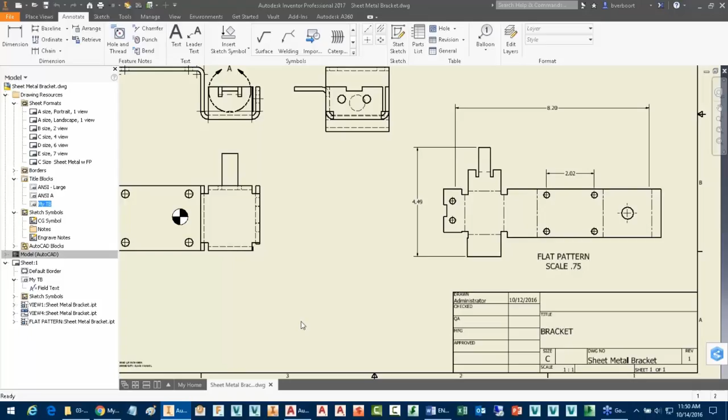Another approach that I take to simplifying and making things work a little bit more smoothly for a design group is to rework the way that templates are structured. In many cases, we just don't really think about this much. I'll go ahead and close this particular

drawing. And when we select new here, we get the standard, organized by dimension type, right? So English and metric. So that's going to help us control standards. But it might be helpful to have additional information organized a little bit differently, maybe by document type.

So I'm going to show you a folder structure that I built out that might be helpful for you guys to consider when creating additional templates to get work done a little more quickly, because each one of these templates is just a blank start. Every time you create a new drawing, for example, it's going to be a brand new fresh start, and that's going to be the case for the part files. That's going to be the case for the assemblies.

If you find yourself doing the same thing, you open a new assembly, you put the assembly notes there for the assembly process type, and you go about creating the views. Well, that's just a lot of work over and over again. You could be using a template that has that stuff predefined in it. That gets you 25% done right out of the gate, and then you're able to focus in on some of the annotation and detailing tasks at hand.

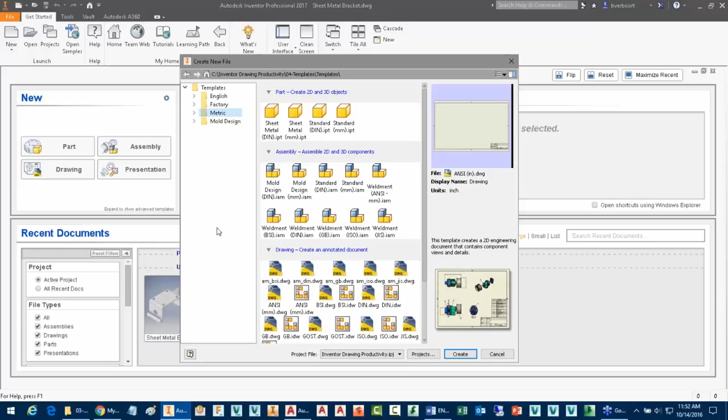So I'm going to go ahead and close up our new dialog box for templates, and I'm going to browse into a folder that I've just used to centralize a couple of options. So right now my project file is pointing to this folder for templates. Let me just make that a little more real. So we'll go to our get started, and I'll go to the projects environment, and then here on folder options you'll see that our templates are coming from this directory called templates in the 04 templates subfolder.

So I'm just going to do a little shell game here, for lack of a better description, just to make things happen a little more quickly. Here's the folder that we were just looking at. Okay, so there's a templates structure that's standard for that new dialog box. So here are the standard templates that we can choose. There's some template customizations we can do for PDFs, and then here's that English folder and all its contents, and then there's the metric folder.

I'm going to suggest that it might be more helpful to use a structure more like this, templates for a new file, that have subfolders for document types. So in this case, I might want several different assembly documents to be closer to done when I open them. When I create a new assembly, I might want to choose between weldments for different types of material. So if we're going to be doing welding, then why not go ahead and predefine in our template either aluminum,

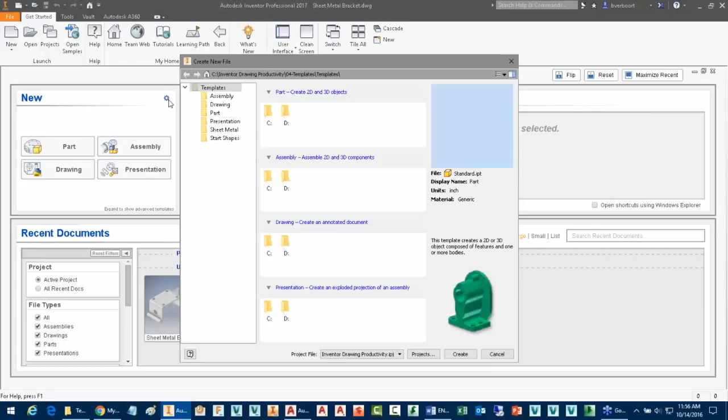So in this case, I'm going to just rename this folder templates. And again, just play the shell game here. I'll rename this folder with that different structure that we were just looking at. So now this is the folder that we're going to be exposing when we create a new file. So when I select New now, you see that I have the ability to select from a much smaller list, and it gives me specific assembly types beyond just weldment or standard.

In addition to that, the drawing types, sales catalog, a machining drawing, a sheet metal part, so these are more unique or more specific to the documents themselves, and we get further faster with notes and material types already preset. In the case of presentations, maybe I've got a presentation file I'm using for an exploded assembly. Maybe I've got one I use for internal process documentation, so I'm using presentations to document process steps, and there would be a whole series of explosions already created in this particular document. Same thing with sheet metal.

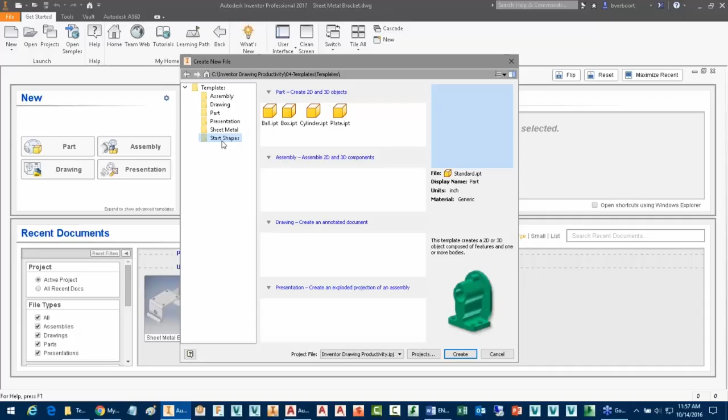Here's an interesting concept. How about using what they call start parts in some software, or start shapes as I've named them here? How about if we just create a new part, instead of opening up a new file and creating a rectangle and extruding it over and over and over again, we use that shape already predefined, and all we're going to do is modify the dimensions. I can have one for a box shape or a plate shape. Again, X, Y dimensions are already there. You're just simply going to modify them.

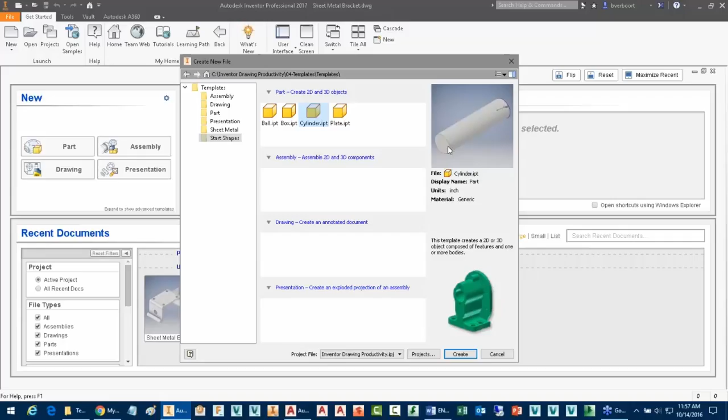How about a shaft component or cylindrical shape? So these are things that just really get us quicker, and you can even go as far as to say, okay, a cylindrical carbon steel, cylindrical stainless steel. So give some consideration to the things that you do over and over again every day. It's tedious.

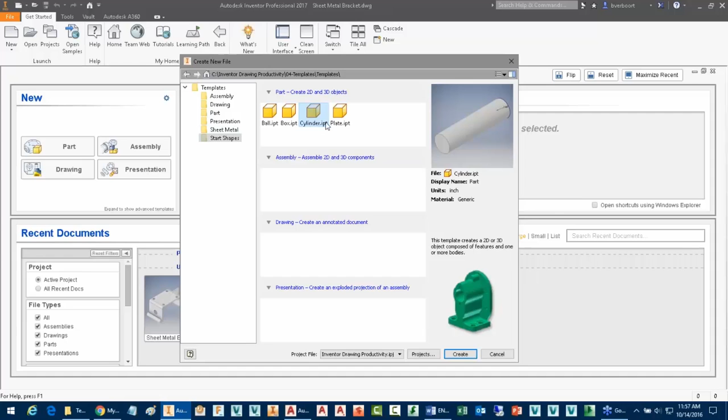So if I wanted to create a new part that started out to be cylindrical, I've already done the task. There it is, right? And I can modify its size and length. I can make it 3. I can modify the extrusion in any way. So it just depends on how many things there are in your environment that you can predefine a standard shape for.

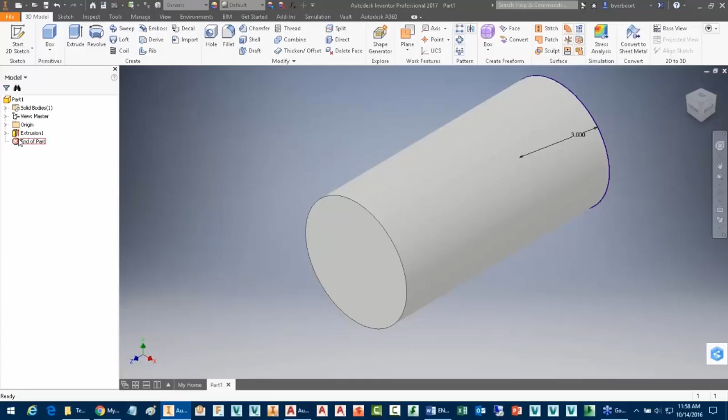So this is a template for a model, but certainly I can do the same exact thing. So now when I create a new drawing for this, which gives me the ability here to create a new drawing as well, I could select the appropriate drawing template for a machined part, and it could even be for a shaft. Again, notes with runout, and those types of things can be included automatically for those document types. Just try to remove some of that tedious effort from yourself and the users you might be trying to support.